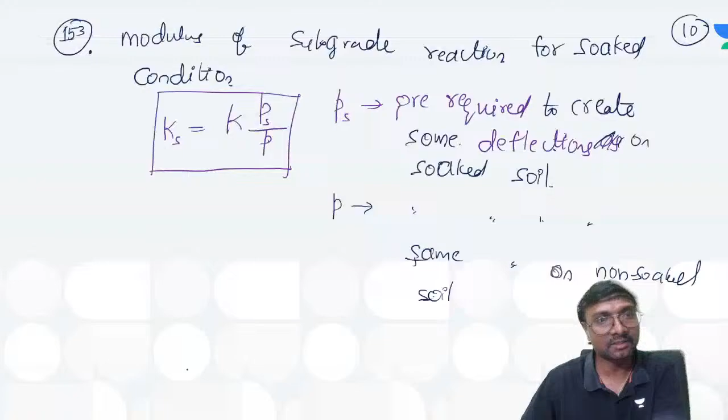153 got here, this is your 154. I forgot, I'm writing like that. 155, 156, 157, this is 158 and 159.

Next, 160th point. What is the 160th point? Los Angeles abrasion value - what is it we have to go for? Los Angeles abrasion value, now how much does it come to be?

You remember this drum will be there, and this drum will be rotating. So what is inside this drum? Aggregate particles will be there, and after the test is over, it will be collected and passed through 1.7 mm sieve. Along with the aggregates, steel balls will be there too.

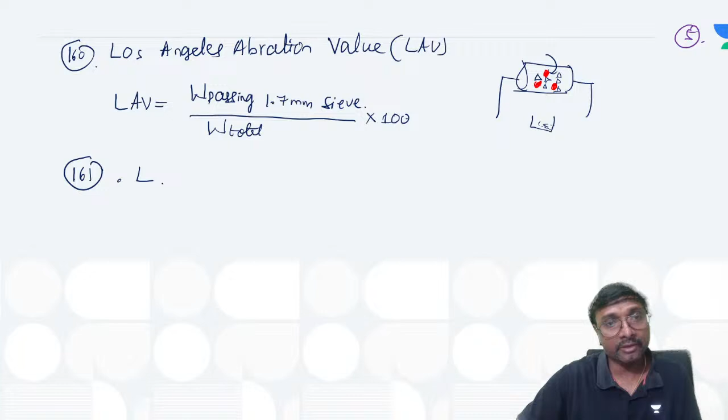Should the Los Angeles abrasion value be higher or lesser? It should not be greater than 16% for aggregates in...

This is for aggregates in cement concrete, okay. Carry on.

So in case of cement concrete, if you are using these aggregates, then the Los Angeles Abrasion Value should not be greater than 16%.

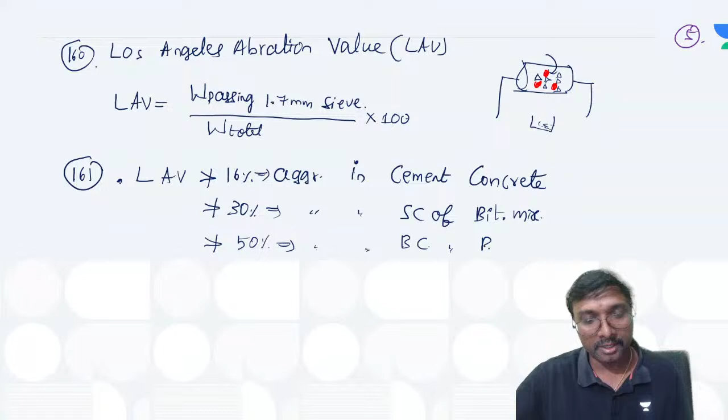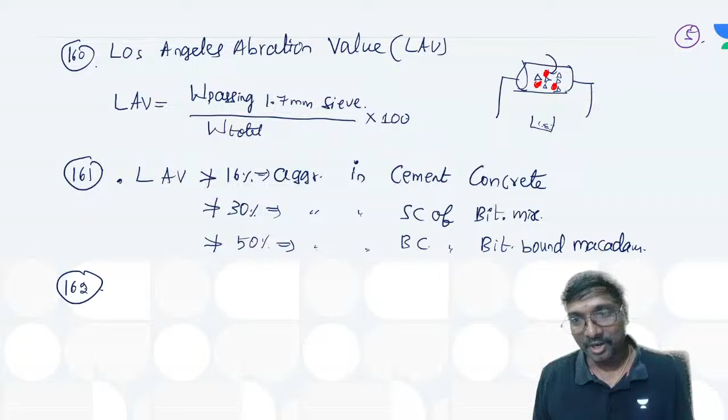Next, 162. Who are you? Who is that fellow? Nobody knows about that fellow, right?

So what is it? Los Angeles Abrasion Value. That Los Angeles Abrasion Value is a measure of which parameters? Tell me. If you just observe, attrition.

What is the meaning of attrition? Tell me. Okay, you are completing everything. Attrition, right? What is the meaning of this attrition? You can say attrition means it is a rubbing action between... Yeah, here actually I forgot to write that.

Los Angeles Abrasion Value is higher means what will happen to this hardness? Tell me. Hardness will be lesser, na? Los Angeles Abrasion Value is higher means that hardness will be lesser, obviously. It is a measure of hardness, right?

Yes. Attrition, what is that attrition? It is nothing but your rubbing action between particles of same nature or different nature. Attrition is the rubbing action between particles of the same nature.

Next, abrasion, what is that abrasion? You can say it is a rubbing action between particles of same nature or different nature. Abrasion is different nature, right?

Yes. Now, third one, impact. So those steel balls and these aggregates rubbing action will be there, that is abrasion. Aggregate to aggregate rubbing, that is attrition. Next, impact. How does that impact come into picture? Tell me.

So whenever this drum is rotating like this, these steel balls and aggregates will go up to a certain point and they will fall suddenly onto the bottom aggregates, is it not? So that is why it is a measure of impact. Yes, it is a measure of impact, you can say we just observe, right?

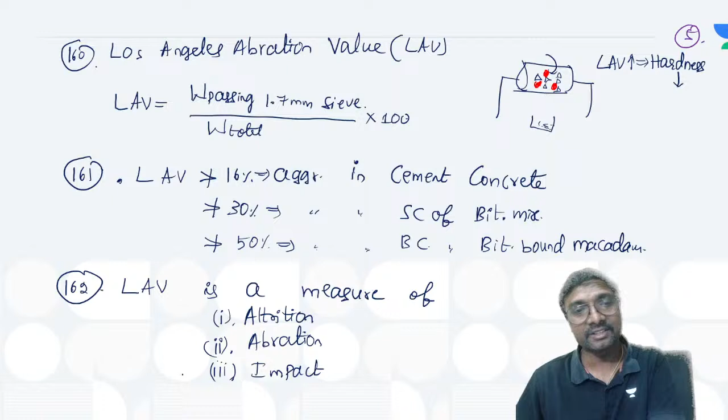So in Los Angeles...

So in this Los Angeles Abrasion test, what is the speed we have to go for? Tell me. What is the speed of this rotation? This is 33 RPM, right? What is that RPM? You can say rotations per minute, na?

And how many number of revolutions we have to go for? What is the total number of these revolutions we have to go for? Tell me. The total number of revolutions will be 500 to 1000, 1500 also we can go up to, 500 to 1500.

These are based on which criteria if you just observe? Based on what? Gradation of particles, na? Yes or no? Based on gradation of these particles, right? Gradation of these aggregates used, right?

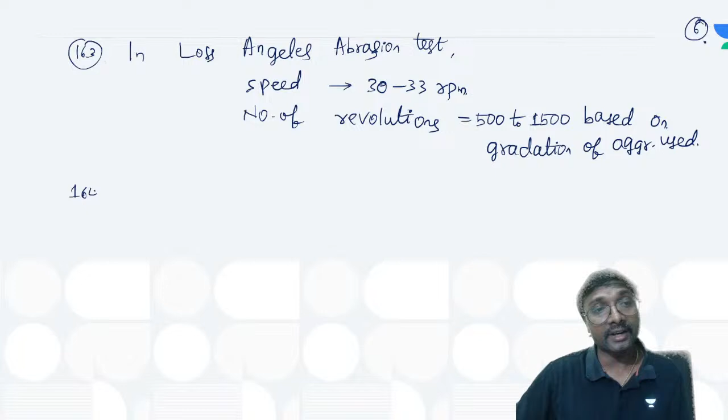What is the meaning of this gradation? Tell me. Gradation is nothing but it is your particle size distribution, you can say.

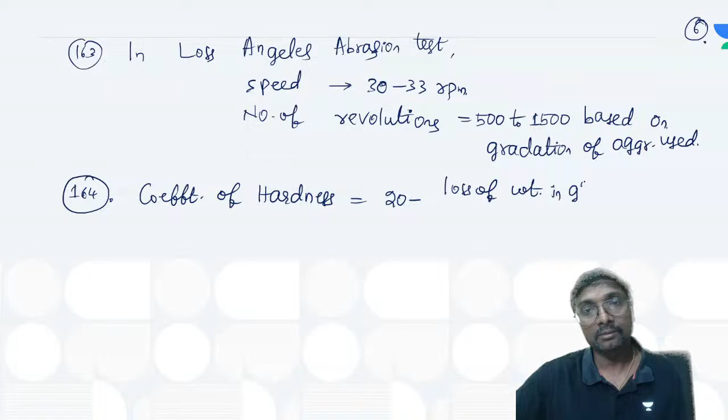Now, next one, what is the coefficient of hardness? If you just observe, how can you get this? Coefficient of hardness is equal to 20 minus loss of weight in grams, G means grams, divided by 3. Now, so what is the specific gravity of this aggregate? Tell me.

The specific gravity will be varying from which one? Generally, this is 2.6 to 2.62, which one? This is 2.9 for what? 2.6 to 2.9 for which one? This is good road aggregates, na?

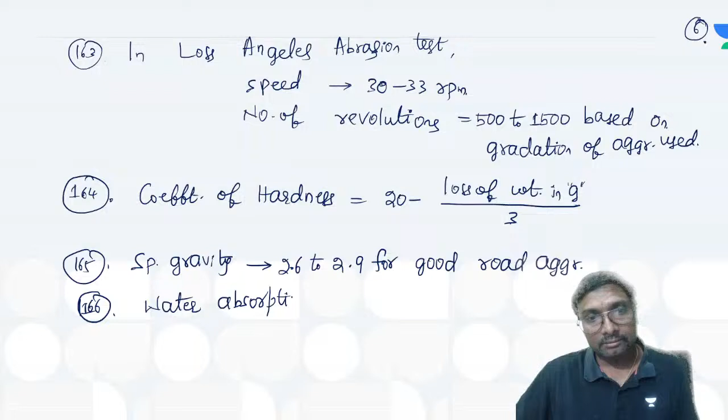Good road aggregates, right? Next point. So it is better the aggregates should be having more water absorption or less water absorption, you can say. The water absorption should be less, it should not be greater than which one? This is 0.6 percentage, right? It should not be greater than which one? This is 0.6 percentage, you can say, if you just write. Is it right? Clear?

Actually, in this aggregate impact value also some values are missing. This is 156, na? In this aggregate impact value, as per IRC we have written, but as per MORTH they have given separate specifications for this actually. I'll add those. Limits of, in that 156 point only I will be writing, right? Because if I write 157, everything will be changing again. So this page number also 3A I will write, okay, so that other page numbers need not change.

So what is that, you can say, if you just observe limits of this aggregate impact value as per what? MORTH. What is that MORTH? MORTH is nothing but which one? Ministry of Road Transport and Highways, na? In that aggregate impact only I am writing, right? In that aggregate impact only I am writing, okay? Limits.

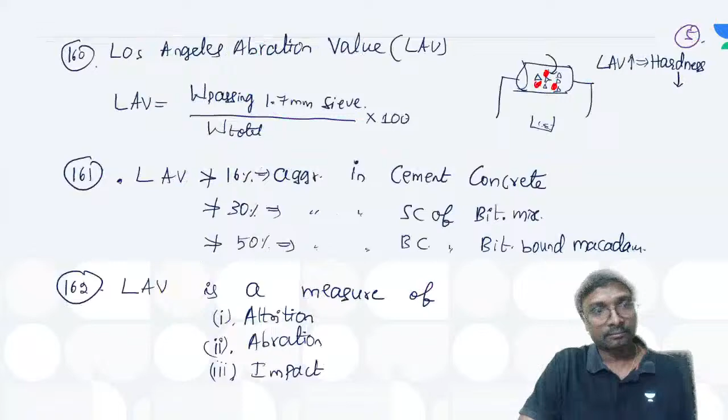Right. Now, what is that soundness? What is the meaning of this soundness? Tell me. Soundness is nothing but your durability or not, right? Soundness is nothing but which one? This durability you can say, right? So whenever you are testing, that will be testing with which solution if you just observe? This salt solution will be taking, and what is the salt solution if you just observe? That is your Na2SO4 sodium sulfate, or you can also say it as which one? This is magnesium sulfate, na? MgSO4, okay? Sodium sulfate or magnesium sulfate, at which one? This is 105 degrees to which one? This is 110 degrees centigrade, right?

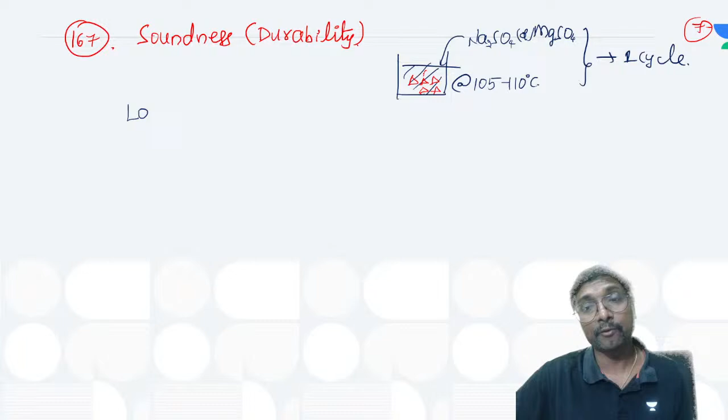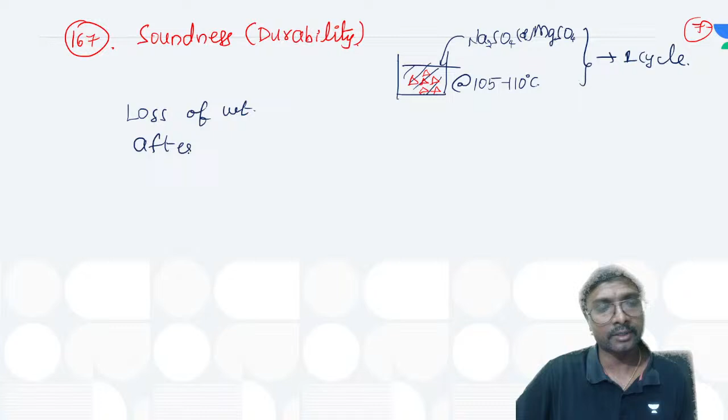So whenever you are testing it like this, right, this will be called as one cycle of testing if you just observe, right? Okay, one cycle of testing, right? So after repeating this process for 10 cycles, right, you will be having the same weight or you will be having some weight lost. You will be having some weight lost for these aggregates, na? So these are your aggregate particles. Original weight, whatever the weight you are taking before conducting the test, it will be same or it will be lost, definitely. You will be losing some amount of weight, definitely, na? Yes or no? This is your loss of weight after how many cycles if you just observe? Loss of weight after 10 cycles. It should not be greater than which one? This is 12%. When it tested with what?

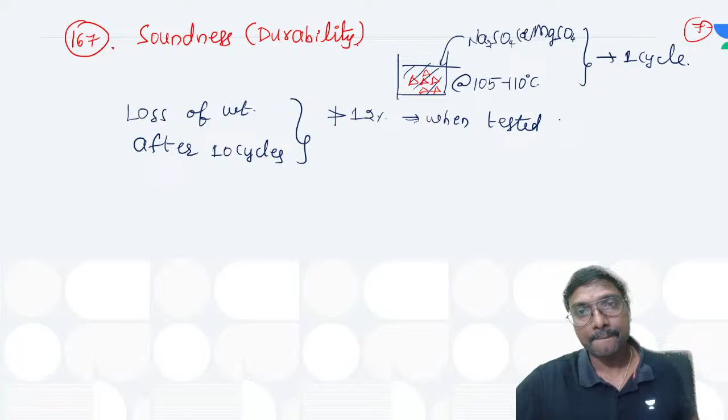When it tested with what? Magnesium sulfate. And it should not be greater than which one? This is 18% when it's tested with what? That is sodium sulfate, right? Na2SO4 if you just write like that. Got it? That is your soundness test, right? Isn't it?

Now, we'll be going for which one? This is shape test. I think almost all tests are over. Shape test and this is stripping value test. If you see, it's over. Whatever we have discussed there in 1.5 hour class, 2 classes, 3 hours, just within 30-35 minutes we are completing. Okay. Shape test and the stripping value. Anything else left? Nothing else left, it seems. Yes, na? Very fastly we did. What is that, a flakiness index? A particle is flaky.

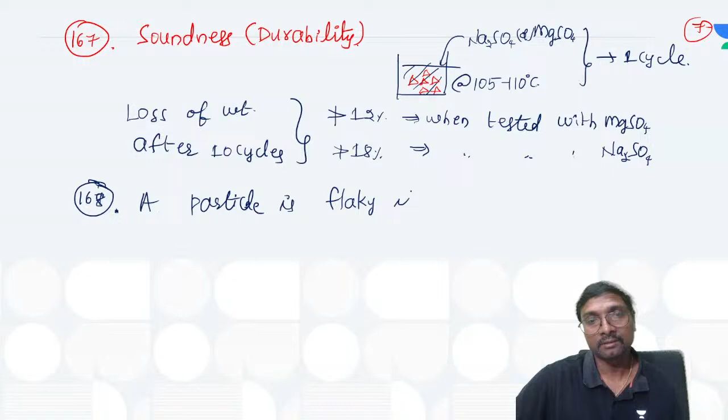A particle is flaky when the thickness, which is nothing but the least lateral dimension, is lesser than 0.6 times the average size of its group. Now how can you write that flakiness index?

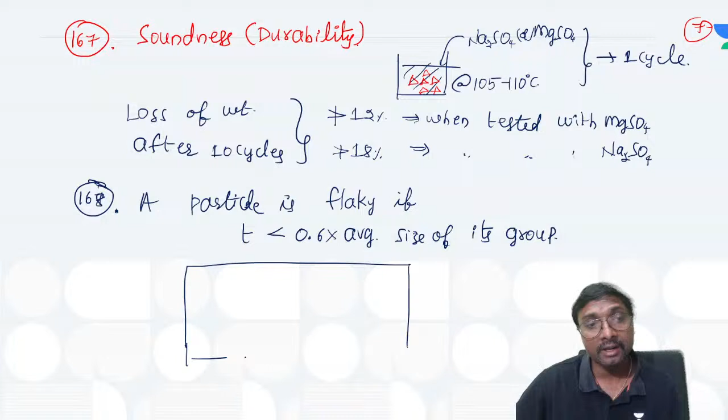That will be measured using a gauge. We'll be measuring the flakiness of a material using what is called a thickness gauge. These are the different slots we are having, let us say.

So which gauge is it? It is called a thickness gauge. Suppose it is written here like this: 20 to 15 millimeter, 15 to 10, and this is 10 to 5, right? Just for an example.

It is written means what do we need to understand? These numbers will be written on this thickness gauge, if you just observe. Have you observed these numbers, everyone?

From the first slot, which material do we have to pass? If the numbers are given like this, what do we need to assume? We need to assume that material passing 20 millimeter and retained on 15 millimeter, that we have to pass through this first slot, if you just observe.

That is the meaning of it. Now what thickness are we selecting? What is the thickness of this one? 0.6 times the average size, which is 17.5. Here also, what thickness are we selecting? 0.6 times the average size, which is 12.5. Like that we are selecting.

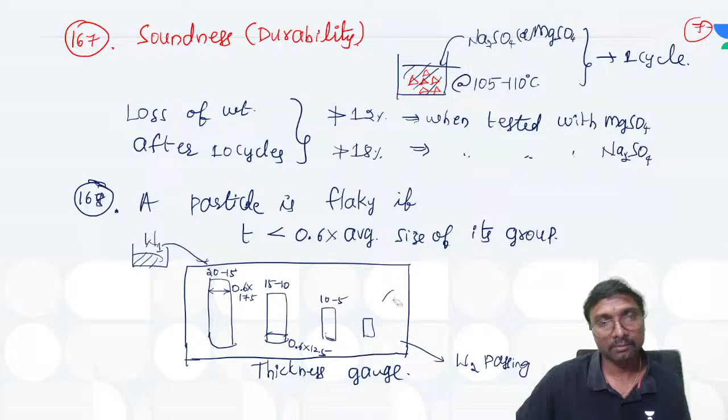So after passing, how much will it be? This is W2. W2 will be retained, W2 will be passing, no? So W2 passing, let us say, just for an example. So here 169.

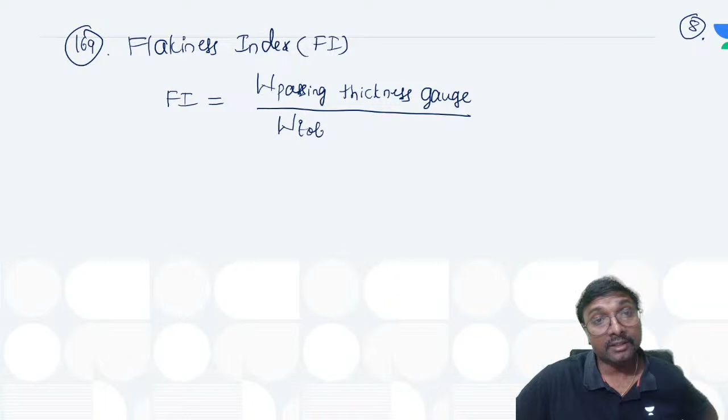So what is the flakiness index, if you just observe? Which one will we be calculating? That is your flakiness index. What is that flakiness index? You can say flakiness index will be nothing but the weight passing this thickness gauge, divided by the initial weight taken. If you just observe, the total initial weight is taken as 200.

So how can you write that Fi will be equal to how much? Weight passing, you can say W2 weight is passing, original weight is W1. So how can you write this? That is W2 by W1 into 100. That is how we'll be getting the flakiness index, and it should not be greater than 15% as per IRC. Now, what is the next one, if you just observe?

Elongation - we mentioned a particle is flaky when the thickness is lesser than this. A particle is elongated when you observe its length - will length be higher or lesser? A particle is elongated if its length L is greater than 1.8 times the average size of its group.

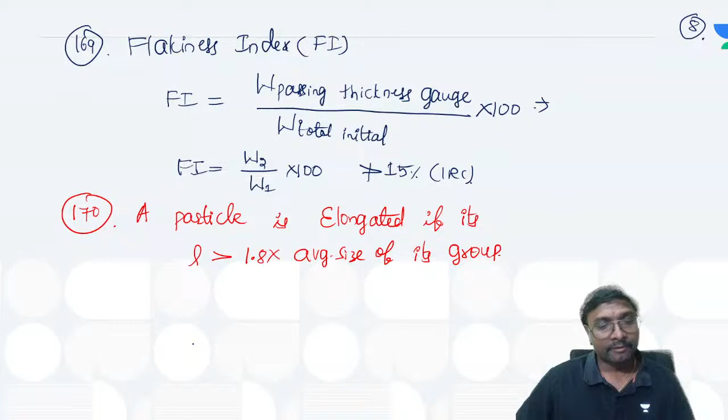Now coming to this, which gauge will we be using here? Tell me. Length gauge we are using, na? For identifying flakiness, we use the thickness gauge, but for identifying elongation, we have to use the length gauge only. These slots will be there.

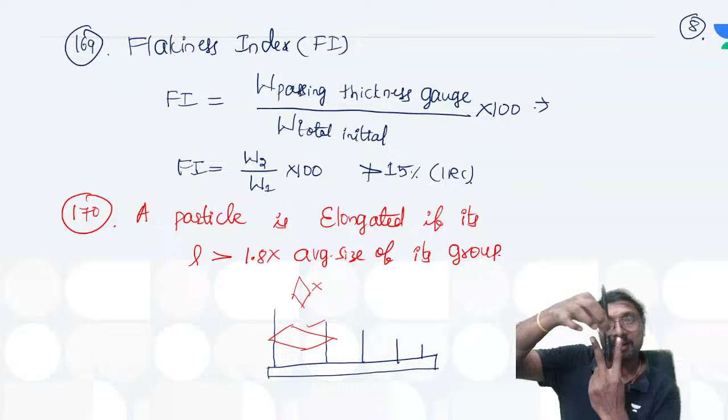Previously, how did we pass the material? We passed along the thickness direction. For this one, we try to pass in the length direction. If we try to pass in the thickness direction, every particle will pass, so we should not do that. We should pass in this manner, through these slot openings. Length gauge means we have to pass it along the length only. Obviously, this is your length gauge.

Now what are the things written here? This is written as 20 to 15, this as 15 to 10, let's say this as 10 to 5, just for an example. Then what is the slot dimension we need to take? This slot dimension we have to take as 1.8 times the average size of this 20 to 15 group, which is 17.5, isn't it?

What is this slot dimension? We have to take it as 1.8 times the average size of the 15 to 10 group, which is 12.5, right? Like that we have to select it.

Now tell me, which material do we have to pass through this? Do we pass the entire W1 again, or only W1 minus W2 through this length gauge? W1 minus W2 only we have to pass through this length gauge. And how much is retained? We have to consider this retained amount, W3. You have to be careful - if you want to identify longer particles, they should not cross this gauge, they should stay on it. Only then will they become longer, right?

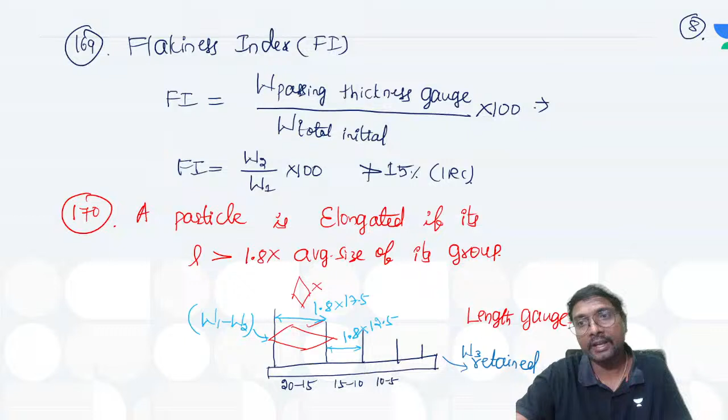Is that clear? Note it down and tell me. Everyone done? So next, what is elongation index, and how do we calculate it here? This is 171 point.

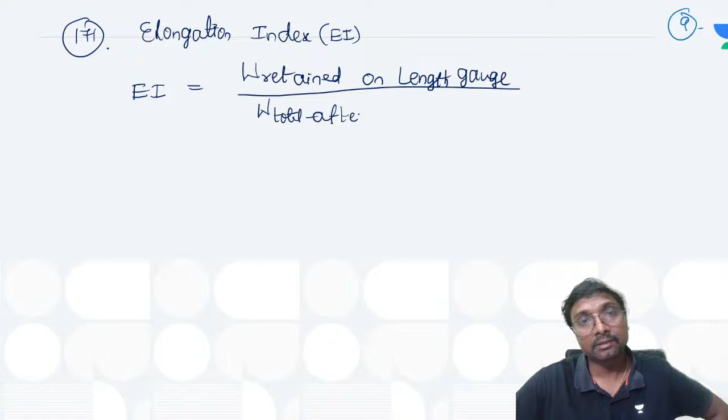Elongation index - what is that elongation index? Tell me, EI, how much do we have to take it? That is weight passing or weight retained, we have to take weight retained, on this length gauge. Weight retained on this length gauge divided by which weight? We have to take the total weight after eliminating the flaky material. We have to remove all the flaky material and again conduct the test after eliminating flaky material.

So already from the first test, flaky material is eliminated, right? So after conducting the first flakiness test, then only we have to come to the elongation test now. Is that the sequence we have to follow or not?

So what is that elongation index? You can say that is your weight retained on this length gauge, W3, divided by the original weight, which is W1 minus W2, into 100. So the elongation index is W3 by W1 minus W2 into 100.

This elongation index should not be greater than 10 to 15%, as per IRC. So elongation test will be conducted.

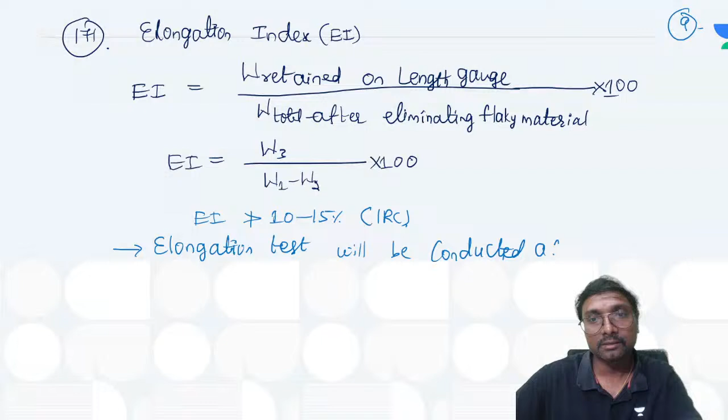Elongation test will be conducted after the flakiness test is over. After this flakiness test is over, then only we have to conduct the elongation test. So can you conduct both simultaneously, or in reverse manner?

No. First we have to eliminate the flaky material, then we have to find out the elongated material. Got it now? Clear, this elongation index.

Next, what is another shape test you will be having? If you observe, another shape related test will be the angularity test. So if you study this angularity test and the stripping value test, then aggregates is over.

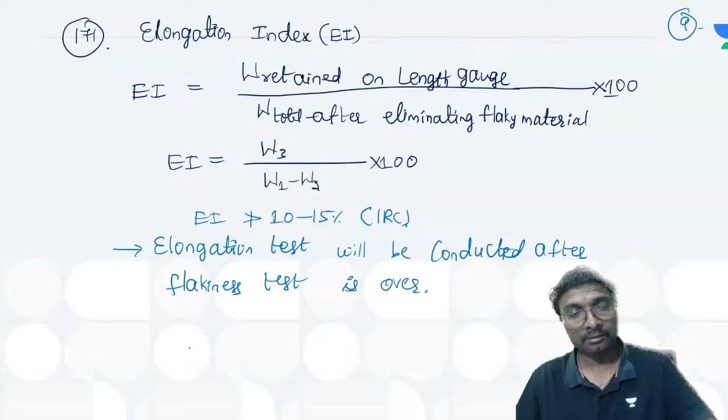Bitumen also will start now itself, because afternoon class at 12 o'clock is there. In that time the class may not be sufficient to complete bitumen. Today we'll take up to 9 o'clock, and today also we'll do a little bit of bitumen, so that in the afternoon class we may finish off that bitumen comfortably. It is at 12, not 2. Any class at 12? I think no class now. No class, right? Great, no classes, because KPSR is also taking 11 to 1 SSC JE class at that time, so no problem.

So what is that angularity number? If you just observe this angularity number, tell me, what is the angularity number? If you observe, this is defined as the voids, it is just voids only, it is a percentage voids.

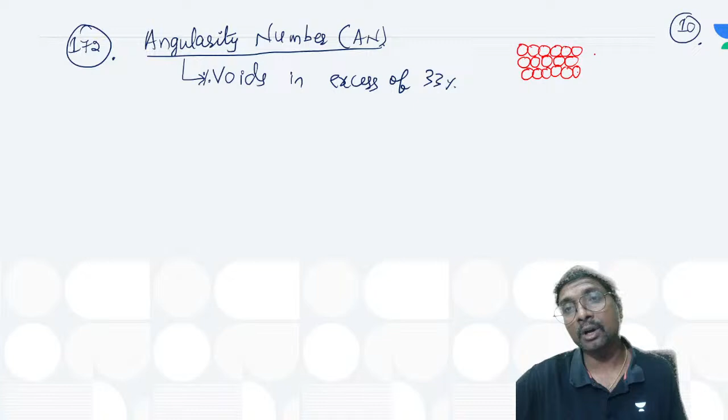It is a percentage voids in excess of what? Percentage voids in excess of 33%, right? Why 33%? If all are spherical particles placed in a compact manner without any other material, then how many voids will come into picture out of the total volume? So here voids will be equal to 33%.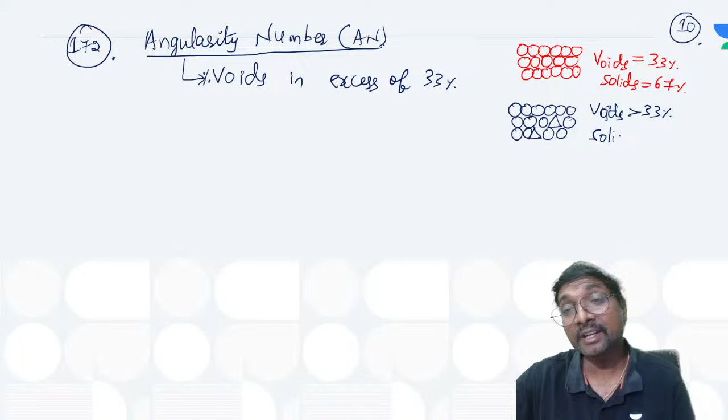And the solids will be occupying this 67%. So suppose these are all round aggregates, but in between angular shaped particles came into picture. Whenever these angular shaped particles came into picture, more gaps will be created compared to before. So then the voids will become more than this 33%, and the solids will become lesser than 67%. Got it or not?

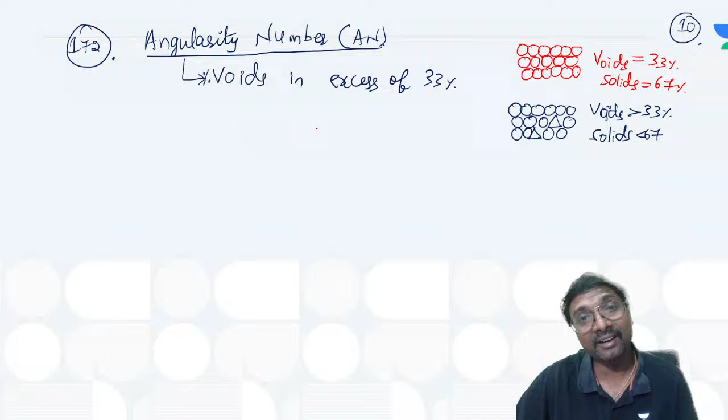So here, voids in excess of 33%, you can also define it as percentage solids in deficit of how much? In deficit of 67% means how much lesser than 67%. Solid volumes are how much lesser than 67%, or voids volumes are how much greater than 33% - that is the meaning of it. Understood? Both the ways we can define this angularity number, right?

Both the ways we can define this angularity number - from a calculation point of view, how can you calculate it? Let's say for example, 173. That angularity number will be calculated as percentage voids minus 33, or equivalently 67 minus percentage solid volume. Both are same - first one is according to the first definition.

Excess of 33 means how much more than 33. In deficit of 67 means how much lesser than 67 - that is percentage solid volume, you can say. Okay, how can you get this angularity number?

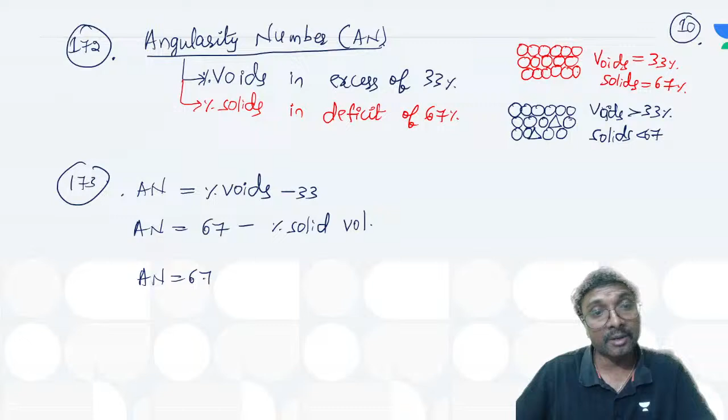67 minus the percentage solid volume - it is weight of these aggregates divided by weight of this water, into the specific gravity of these aggregates. G means specific gravity, the symbol. Specific gravity of these aggregates into 100. This is how we get the angularity number.

How can you get the weight of this water and all these things? What experiment do we have to do? First, you take this empty cylinder - that is your W1. Then you move it and completely fill it with aggregates, without any gap, so this is your W2.

Now, third step, you remove all these aggregates and completely fill the cylinder with water - this is your W3. So in this case, how can you get that angularity number now?

67 minus - what is the weight of this water? That is W2 minus W1... wait, did I write it reverse? Weight of aggregate by weight of water - yes, correct, weight of aggregate by weight of water. This is reverse now, let me fix it.

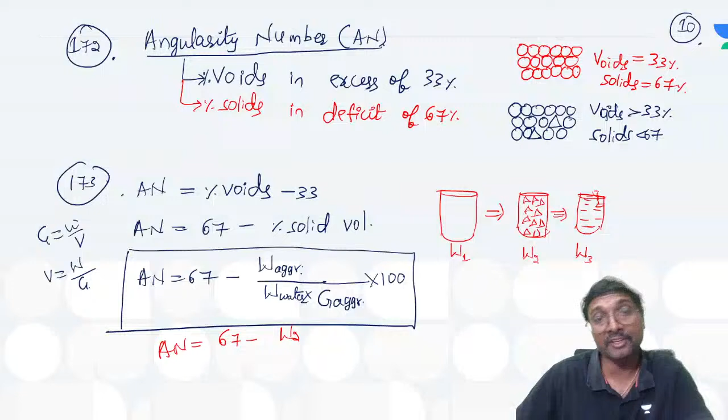That way you can remember it if you are forgetting like me also - mistakes happen sometimes. Check whether weight of aggregate by specific gravity of the aggregate satisfies the volume definition or not. Got it now?

So angularity number minus - what is the weight of this aggregate? It is W2 now, W2 minus W1, divided by weight of water, which is W3 minus W1, into specific gravity of these aggregates, into 100. Now how can you get the specific gravity of these aggregates - can you get it from this or not?

No, W1 is the empty weight, you can say. So the formula I have written is correct - W2 minus W1 is the weight of aggregate, divided by W3 minus W1 which gives the weight of this water, divided by the specific gravity of these aggregates.

Now tell me, is a higher angularity number allowed or a lesser angularity number allowed? This angularity number will be varying from 0 to 11 only, as per IRC. That is your shape test, you can say. Note this and tell me.

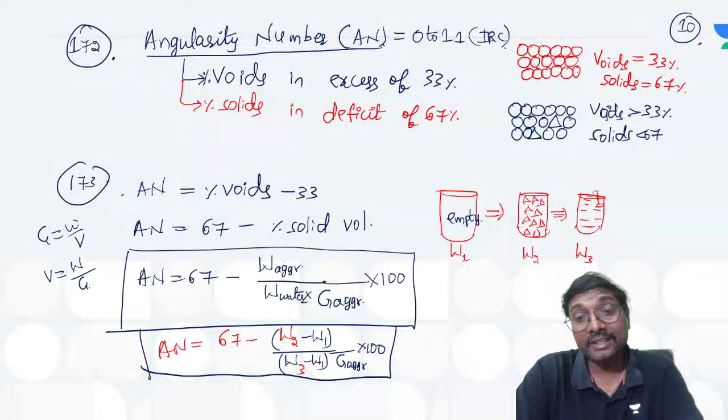Right, done? So here, what is the next one? You can say we just establish the stripping value. What is the meaning of this stripping value?

Stripping value, it should not be greater than which one? This is 5%, no? And it is mainly for which purpose? For using bituminous surface dressing, penetration macadam, bituminous macadam. For aggregate used in what activities?

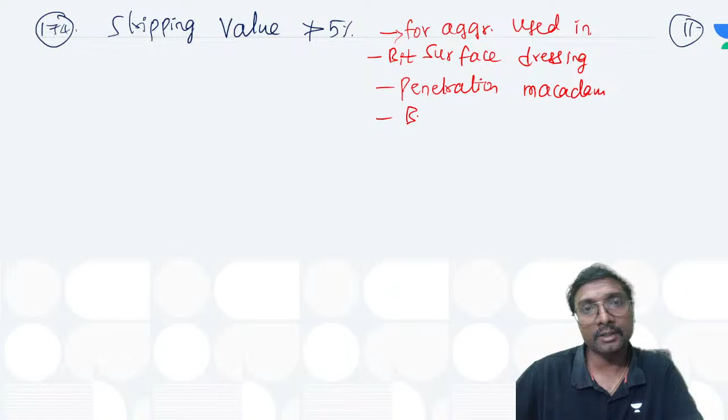For aggregates used in which activities, you can say? Surface dressing, bituminous surface dressing only, no? Because the stripping value means it is bitumen removal only, no? Surface dressing, next penetration macadam. Next what else we are having? That bituminous macadam, penetration macadam or bituminous macadam, you can say.

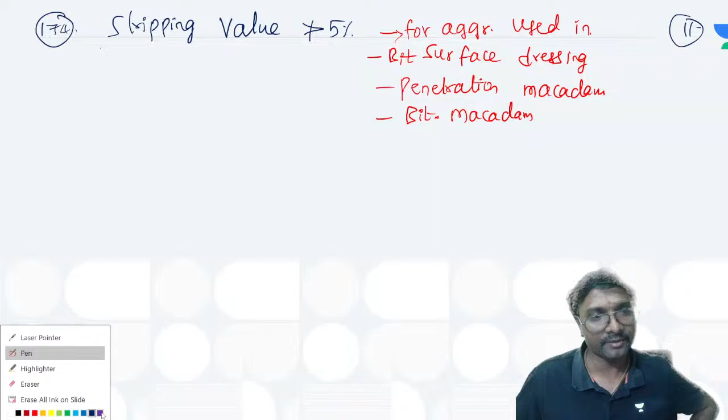So now what is the meaning of this stripping value? Do you remember that test, everyone? So stripping value is nothing but which one? What is the definition? How can you write the definition of the stripping value? It is a surface area

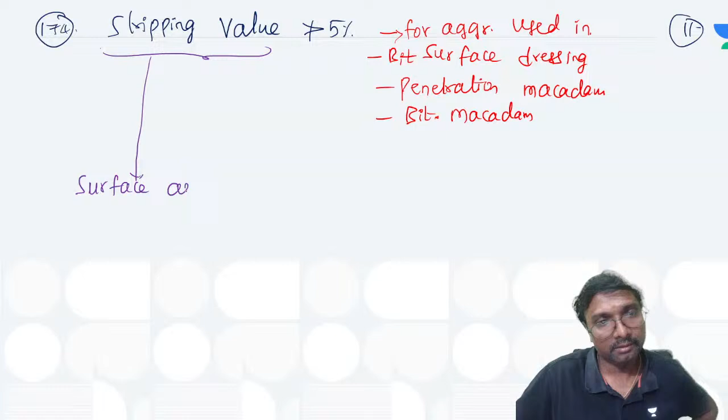of which aggregates? Is it simple aggregates or bitumen coated aggregates? It is bitumen coated aggregates, na. It is a surface area of aggregates whose bitumen is removed.

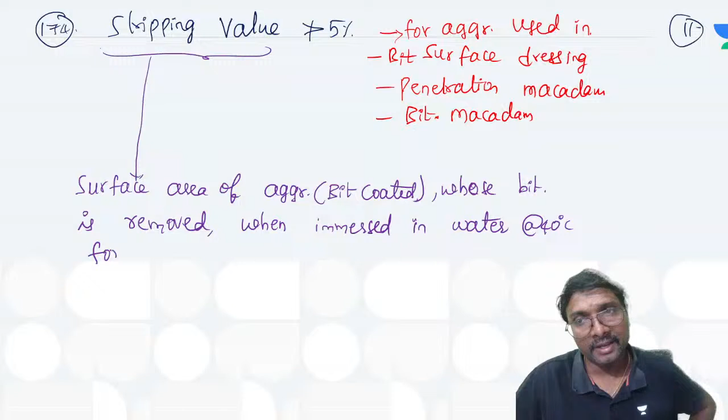Removed under which conditions? Tell me. When it is immersed in water, na? When immersed in water, at which temperature? You can say 40 degrees centigrade. For how much time? You can say for 24 hours.

So first what you do, you take all these aggregates and coat with the bitumen properly, so every surface, each and every part will be covered fully. Then once it gets dried, you immerse it in the water at 40 degrees centigrade for 24 hours. Then some amount of bitumen will be removed. So that amount of surface with bitumen removal is called the stripping value.

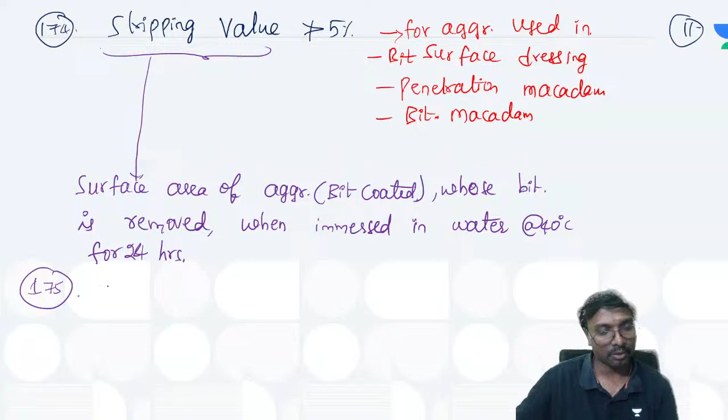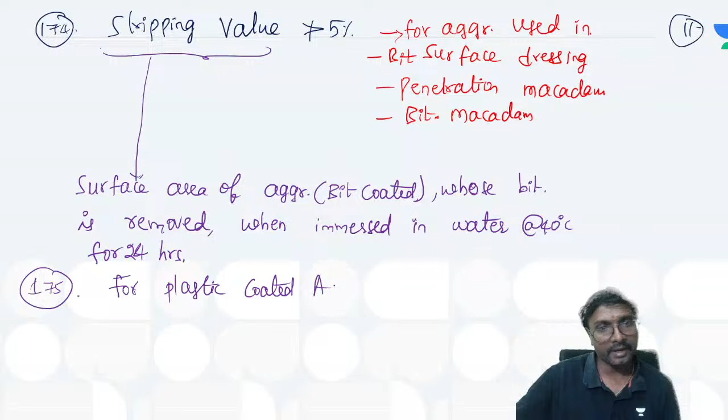Now for plastic coated aggregates, what is that stripping value? 0, no? For this plastic coated aggregates, what is the stripping value? You can say that will be 0, obviously. Stripping value will be equal to 0.

So this completes your aggregate test. Note this and tell me. Clear, everyone? Anything did we miss? I think nothing is missed, it seems. Did we miss anything or no? We did not miss anything, na. Okay, note this and tell me, then we will move to the next.

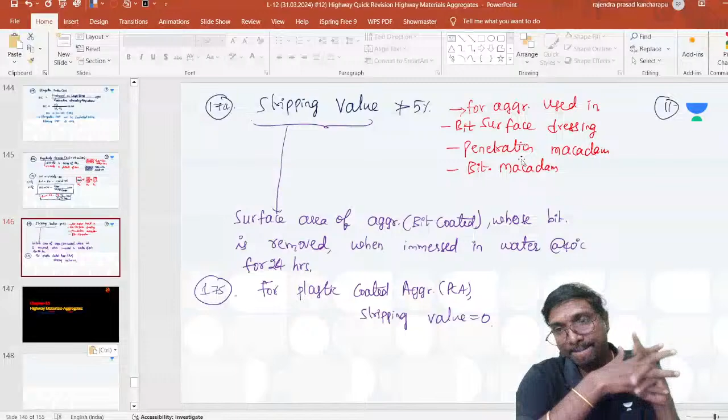Done? Okay. Here, this slide itself, I did not think that we'll be doing bitumen. Next we'll be going for which one, you can say? This bituminous materials. Okay, this is the 11th slide.

I think compared to the plus class, this quick revision itself is going forward. Don't worry, after completing the pavement design in those plus classes only, we'll come back to this quick revision of pavement. Yes, that is why you call it quick, na. Whatever we discussed in those 70 classes, just discussed in how many classes? Tell me, this is some 12th class, is na? Yeah, we do live test until that pavement design comes nearby, we'll do the live test.

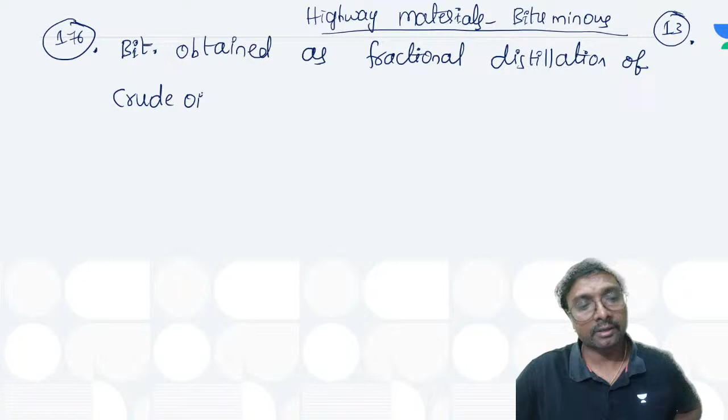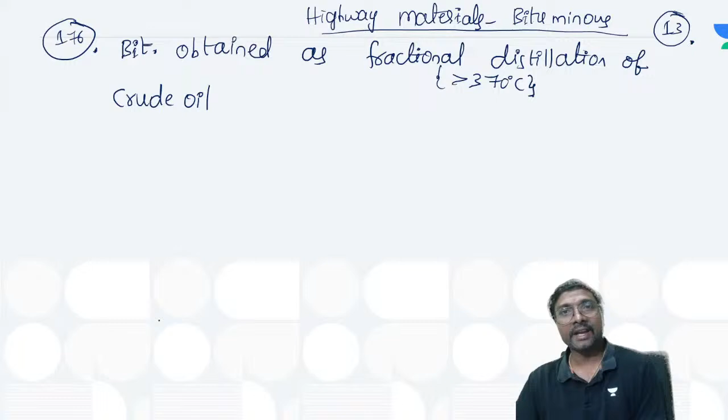Fractional distillation of which oil, you can say? Crude oil. So fractional distillation means at which temperature? Tell me, at more than 370 degrees centigrade. If you remember the diagram which I have given in our plus class, right? Bitumen is obtained as a fractional distillation of crude oil as a residue. In all these residuals, it will be obtained. Bitumen is also one of the residues, that black color residue, isn't it?

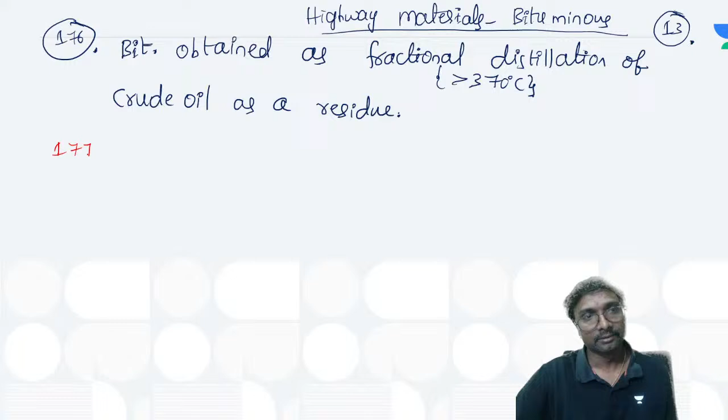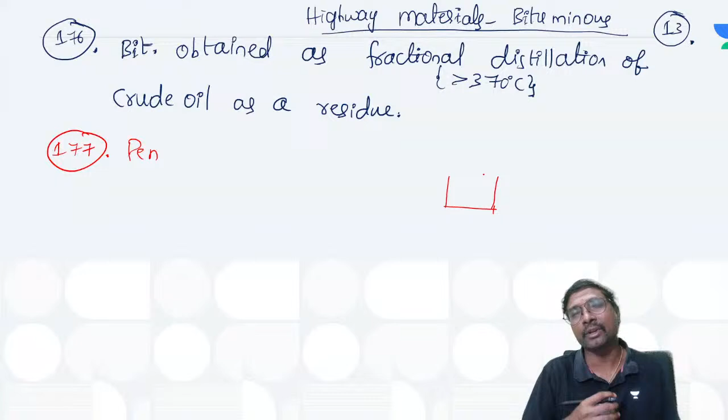So here what is that you can say? This one. This is your bitumen only, na? Yes or no? At which temperature we are conducting this test? That is important, that is 25 degrees centigrade we are conducting the test. And what is that you can say, that a needle will be there here or not?

And it is attached with how much weight? Tell me, this needle is attached with how much weight? Tell me, that is your 100 grams weight, na? That is your 100 grams weight.

So here, what is that you can say, the penetration value? So this is freely falling for how much seconds? Tell me. Free fall for how much time? Tell me, free fall for this 5 seconds will be allowing, na? This 100 grams weight will be allowed to fall freely for this 5 seconds, right? Isn't it? Now coming to this penetration value, right?

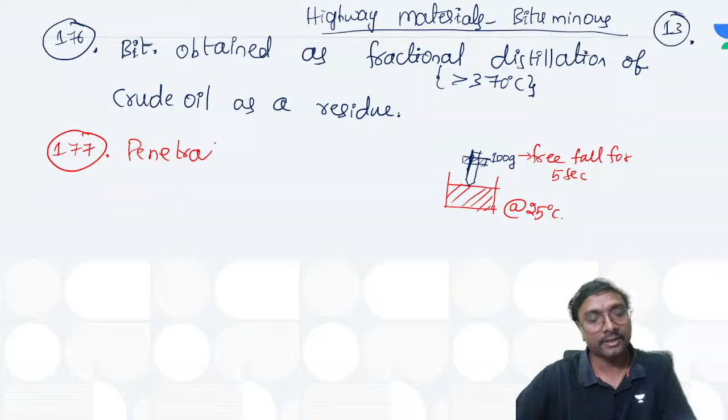What is the penetration value? If you just observe, what is the penetration value? If you just observe, you can say that penetration value will be which one? It is the depth of penetration. It is the depth of penetration of what? Of a needle. Of a needle, which one?

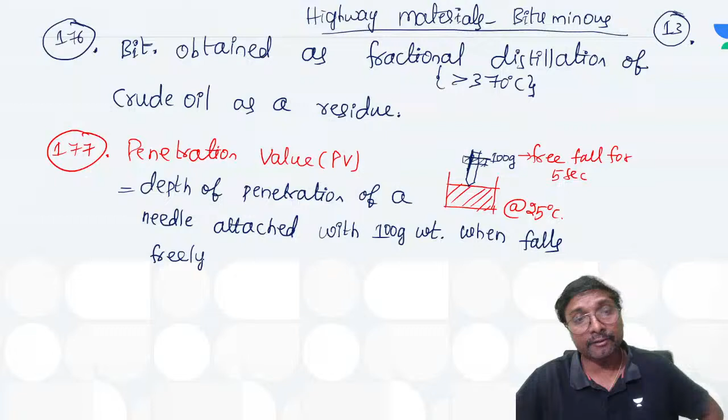It is attached with some weight, you can say. Needle attached with 100 grams weight, na? Which is attached with 100 grams weight when allowed to fall freely, right? When falls freely for how much time? Tell me. When falls freely for how much time, you can say? Falls freely for this 5 seconds, na? At which temperature? This 25 degrees centigrade, right? Everything gets over now. So, and it is measured in units of which one?

How is it measured? Measured in the units of this millimeter, sir. It is measured in the units of this 1/10 of millimeter. Tell me, it is measured in the units of this millimeter only, or it is measured in the units of this 1/10 of millimeter? If you just observe, which units are we using for this? We are measuring it in terms of which one? This 1/10 of this millimeter. If you just observe, absolutely correct, right? 1/10 of this millimeter only we are using, you can say. Yes, no? Isn't it? 1/10 of this millimeter only we are using, right?

Now, so here measured in the units of what? 1/10 of millimeter, na? One tenth. So means what is that 1 unit of penetration value? 1 unit of this penetration value will be equal to which one? This 0.1 millimeters or not? 0.1 millimeters, right?

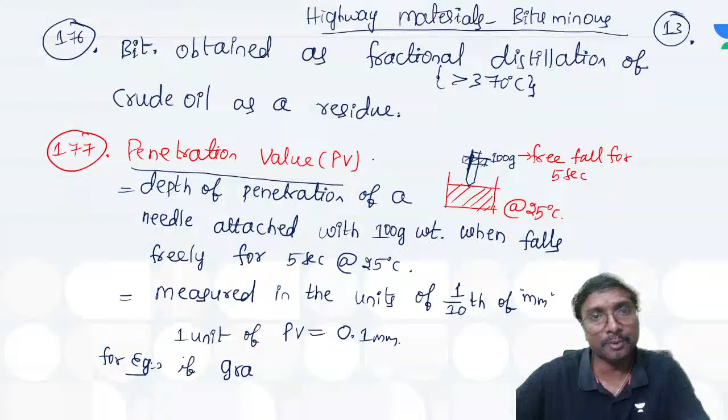So for example, if grade of bitumen is, right, so this penetration value will be using for which purpose? Will be using for this grading purpose or not? Okay, I'll write those points later, right? In the next point, I'll write all of them together. Grading purpose and knowing the softness and hardness, right? All these points I'll be writing.

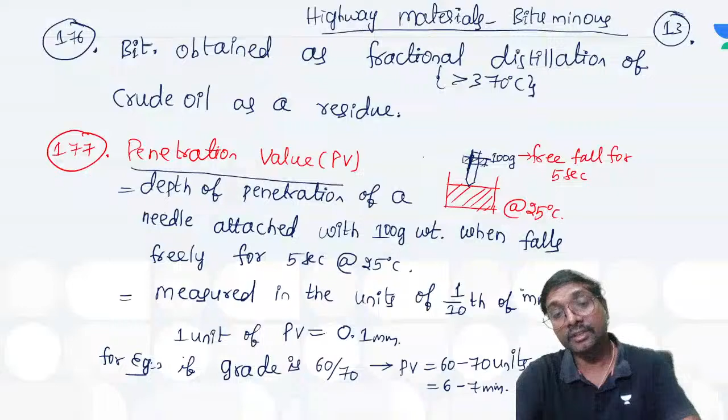If a grade is 60 by 70, what does it mean? You have to understand what it means - it means the penetration value will be 60 to 70 units. It is in between 60 to 70 units, or is it also 6 to 7 millimeters? 60 to 70 units is nothing but 6 to 7 millimeters only, if you just observe. Is it right?

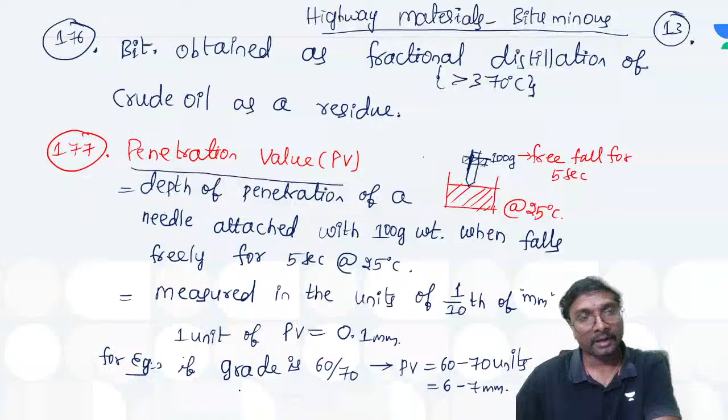Is that it? Right? Not this and tell me. Right? Done? Right? Okay. So now 178.

So what is the purpose of this penetration test? Tell me, what is the purpose of this penetration value test or penetration test? PV means penetration value, right? What is the purpose of this penetration test? It is for grading of this bitumen.

It is for grading of bitumen, and also for which purpose will we be using it? Tell me, if you just observe. It is to define the hardness or softness of this bitumen.

So it is mainly for which purpose, to determine whether it is hard or soft, right? To determine the softness or hardness of this bitumen - you can say that is very, very important. It is mainly to determine the softness or hardness of this bitumen, you can say, just right? Got it?

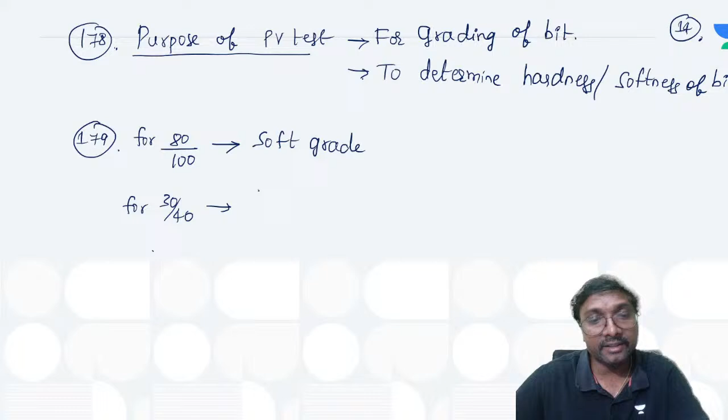30 by 100 will be... sorry, not 30 by 100, 80 by 100 will be soft grade bitumen, and this is hard grade bitumen. Second one, penetration is lesser means it is difficult to penetrate, right? Whenever it is difficult to penetrate means more hardness is there, definitely.

So the first one is soft grade bitumen, and when it is used, where it is used - is it to be used in hot climatic conditions or cold climatic conditions? Tell me. Soft grade bitumen we are using in cold climatic conditions.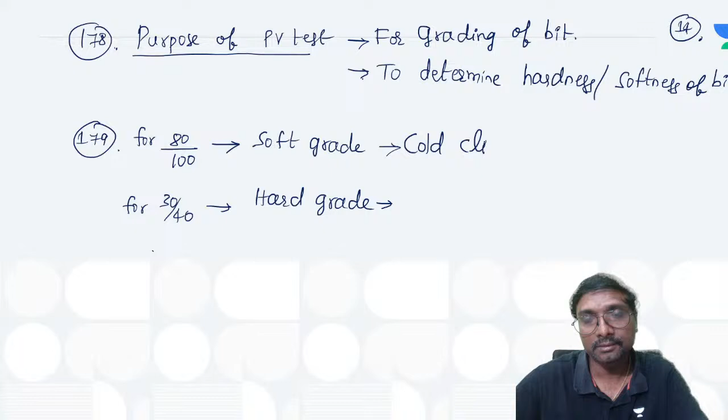Next, the second one, hard grade will be using in hot climatic conditions, right? And 60 by 70 is the grade we are using in which one? 60 by 70, or sometimes it is written as 50 by 70 also - this is used for normal Indian climatic conditions.

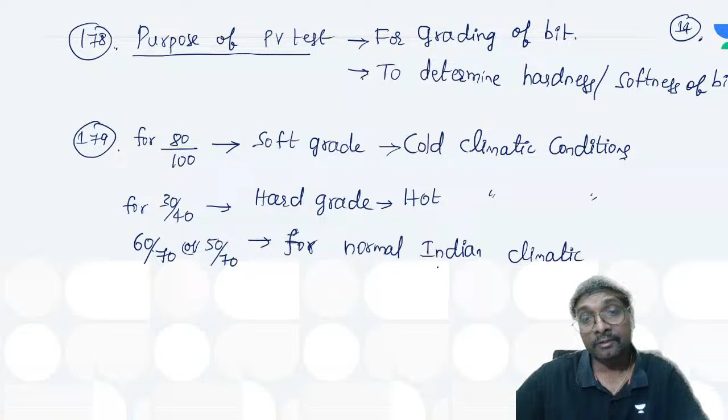For normal Indian climatic conditions, we'll be using this, you can say if you just observe, right? Got it? This is your penetration test and penetration value.

So now next one, if you just observe, what will we go for? I'll write here itself - that's 180. Generally, what should the specific gravity be? Tell me, what should be the specific gravity generally?

That will be 0.97 to 1.02. For which material? Tell me if you just observe - this is for bitumen. And for tar, how much will it be? This is 1.1 to 1.25, you can say, for tar.

This is for this test. Should bitumen have more water content present in it, or should it not? It should not be having more water content present in it. Why? Because bitumen and water are immiscible liquids, if you observe.

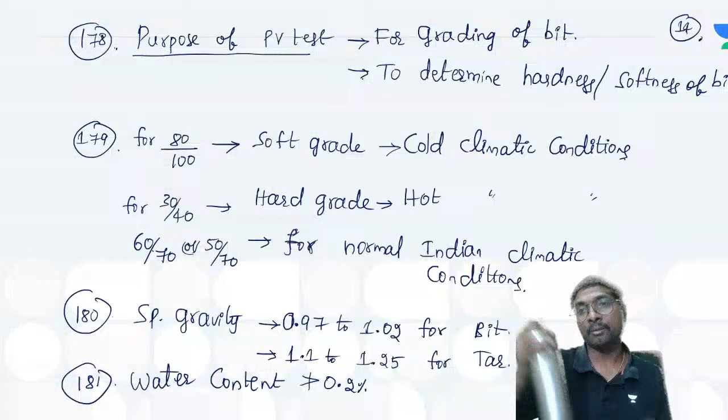Water content should not be greater than 0.2%. In the aggregate, how much was allowed? In the aggregate, up to 0.6% was allowed.

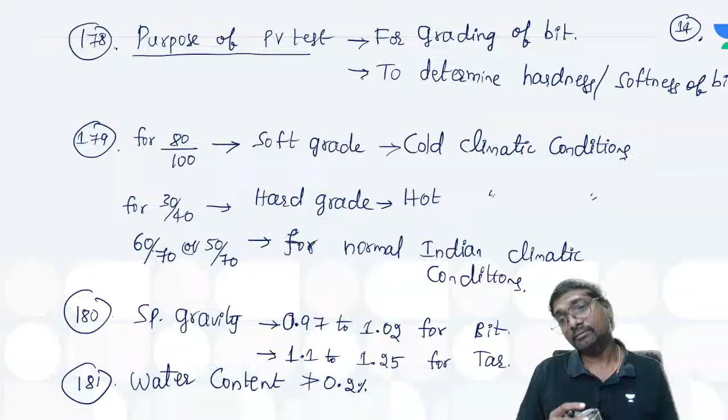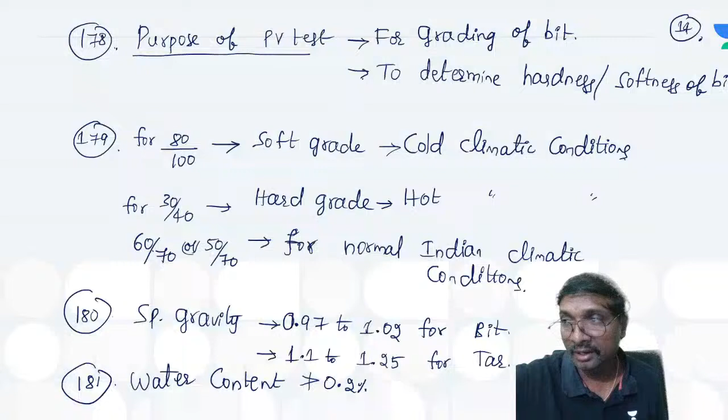Do you remember this aggregate value? In the aggregate, water content allowed is up to 0.6%. Why is water content present in the aggregates? Because whenever the aggregate is there, some holes are inside, so they may be absorbing the water. It is not the outside water, it is inside water only. You have to be careful.

This water content, why will water be absorbed? Because the bitumen is of poor quality, this water will be absorbed, you can say. Got it now?

At which temperature do we have to heat it? When heated at which temperature? 100 degrees centigrade, to find it.

Why should we not heat at a higher temperature? Because if you heat at a higher temperature, there is a possibility that this bitumen also may be lost sometimes.

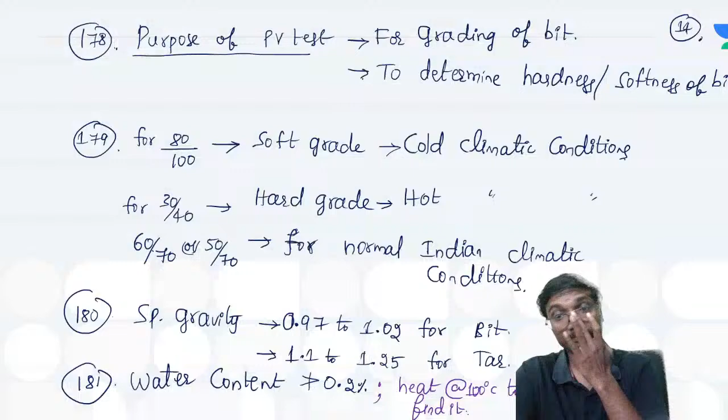Note and tell me. Bottom left, water content. Water content should not be greater than 0.2%. Heat at 100 degrees centigrade to find it. That is right side bottom, heat at 100 degrees centigrade to find it.

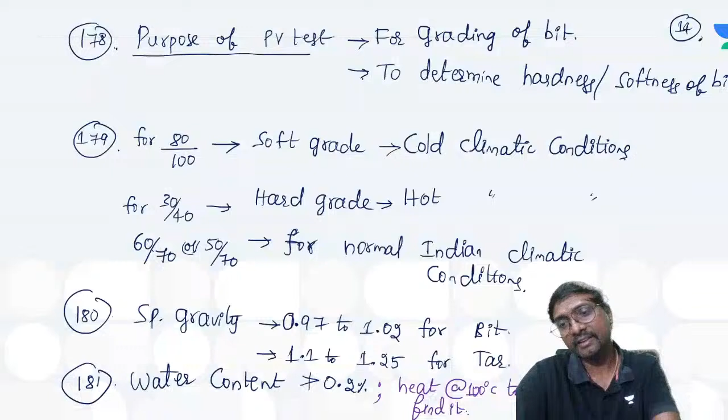Because water will be evaporating at which temperature? That water will evaporate only at 100 degrees centigrade. Will it evaporate at 30 degrees, 40 degrees? No. That is why you are heating at 100 degrees centigrade.

Now, generally loss on heating, at which temperature? At 163 degrees centigrade, for how many hours? 163 degrees centigrade for 5 hours. It should not be greater than 1%.

Because whenever you are heating the bitumen at 163 degrees centigrade for 5 hours, if you are losing some amount of bitumen, it means it is not a good bitumen, you can say, if you observe.

Now what is the ductility test? What is the purpose of this ductility test? We'll see this and then close. It is to measure which property?

This is elasticity and also adhesiveness - how strongly it will be sticking to some other materials. Other material means other than bitumen - it could be aggregate or any other material.

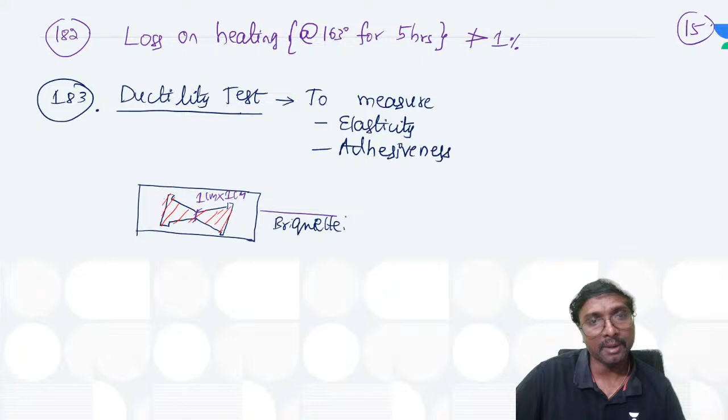What is its dimension? Tell me. That is your 1 centimeter by 1 centimeter square shape, right? Will tension or compression be applied? Tell me. Tension will be applied, you can say.

Whenever you apply this tension, what happens? You can say this will be increasing the length. It will be subjected to increase in length, definitely, you can say it like this.

It will happen that just before breaking, a thread will be formed of this much size only, right? Thread forms like this, just before it breaks, if you just observe.

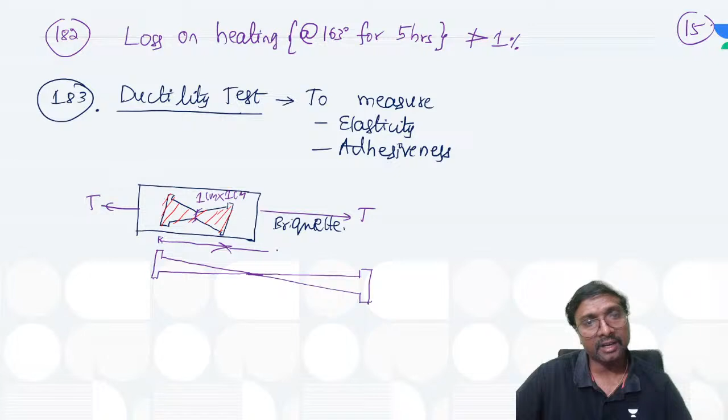So now can we say originally this much length only will be there, and now this is the length extended? So this represents ductility, can we say this is the increase in length? This is called ductility. At which temperature do we have to conduct this?

At 27 degrees centigrade we have to conduct. And what is the rate of loading? It is 50 millimeter per minute. Penetration test is at 25 degrees centigrade, ductility test at 27 degrees centigrade. You have to be careful.

Okay, how can you define ductility? Tell me. Ductility will be equal to the length of this thread or wire formed.

It is the length of the thread or wire formed, just before it breaks, okay, just before it breaks, right?

What is the desirable value? Tell me. Measured in which units? It is measured in centimeters, if you just observe. So it is better that ductility will be how much? Desirable value of ductility will be, you can say, 50 centimeters.

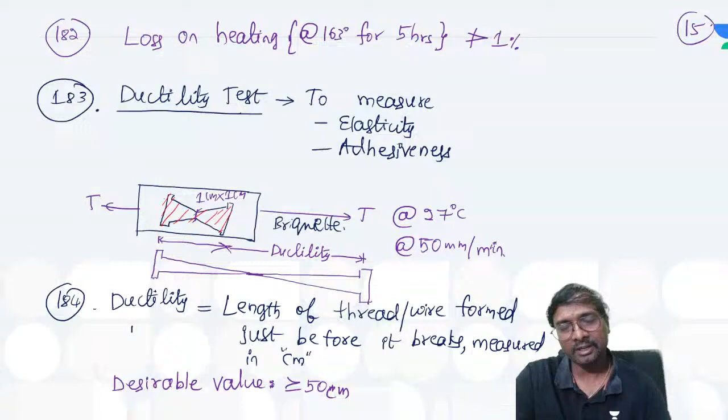Okay, I'll explain after discussing viscosity, the relation between viscosity, penetration, and ductility. All three I'll explain at that time, together, because I thought of explaining after that only. That's why I did not write those points. Any doubts anywhere? Clear?